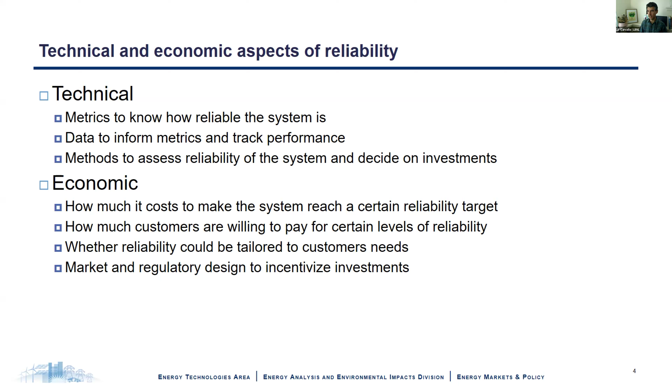As we will explore, the system is reliable in part because we operate it in a way that makes it reliable, but also because it has enough assets, and the right type of assets in the right places, to ensure that the system operates with certain performance levels. We'll cover the investment side specifically, which is tricky because many of our system investments are lumpy and long-lived, so we'll cover some of the specific incentives designed for that.

Just to wrap up this economic and technical element of reliability, I wanted to show this clear chart developed by ERCOT, the Reliability Council in Texas, where they analyzed this. A lot of this graphic won't make sense right now, but hopefully it will be easier to digest towards the end if you know nothing about reliability right now.

This graphic is showing essentially that all the way to the left, the system is underbuilt - it has a very, very small amount of slack. So the total system costs are relatively low, as you can see in the bottom pink line. But the costs of not having power, which are the green and red lines, grow significantly all the way up. The system is just spending a whole lot of money compensating customers for power they didn't have.

All the way to the right, we have a system that has very little value of lost load, very little cost of power not served—it's very, very reliable. But the system is much more expensive; it is more costly to build that system.

ERCOT's analysis found that right there in the middle is where they had what's called a reserve margin—we'll cover what that is later on. That was the sweet spot where they built a system accounting for the costs of not serving a certain amount of power, the minimum across all possible scenarios, from a very unreliable system on one end to an overbuilt, super reliable system on the other.

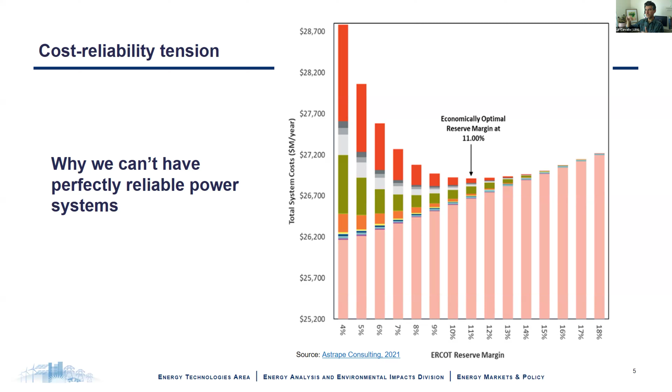This suggests why we can't have a perfectly reliable power system: if you keep minimizing the cost of energy not served, the system cost will keep increasing exponentially.

As I mentioned, I didn't want to leave this intro section without briefly mentioning the relationship between reliability and resilience. They are, of course, related concepts. In some cases they're framed hierarchically, as in that first ESIG graphic I showed at the beginning, where they depend on each other—in that case resilience was shown as a subset of reliability.

In this figure from the Organization of MISO States (OMS), they show it as a spectrum—going from reliability to the left and moving into resilience to the right, depending on the types of events the grid is subjected to.

In some cases, researchers have tried to frame reliability and resilience as distinct, very different things. I have personally been following, and I think the industry is moving towards, treating reliability and resilience as two complementary topics.

For example, DOE's Modern Distribution Grid report describes reliability as an objective of the grid, whereas resilience is an attribute of the grid—such that if this attribute is enhanced, I can more easily achieve the objective of producing and delivering power consistently to end users.

So we are all on the same page. Just in case, the resilience definition underlying this is the one from our recent Grid Modernization Lab Consortium (GMLC): the ability to prepare and adapt to changing conditions, and withstand and recover rapidly from disruptions—encompassing both deliberate attacks and naturally occurring threats or incidents, like extreme weather events, etc.

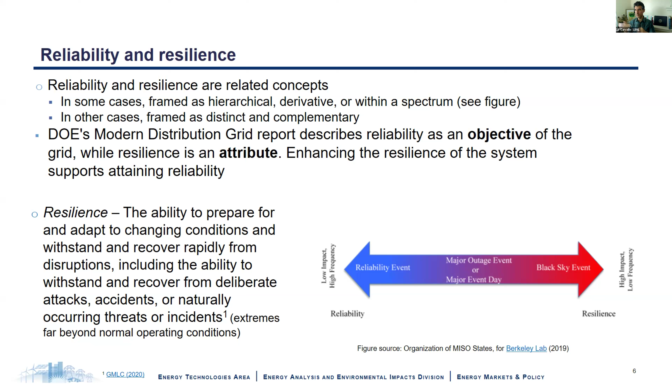This notion of preparing, adapting, withstanding, and recovering is typically associated with resilience across infrastructure in general, not only power systems. As the infrastructure behaves in this resilient way, reliability as an operational objective of the power system is also achieved.

Following this distinction between technical and economic perspectives, and the distinction between different domains in the power system, I'm going to split this presentation into three big groups. We'll spend a fair amount of time on the technical perspectives of the bulk power system.

Then we'll spend a bit less time—largely because there isn't a whole lot of work in that space—on the technical perspective of the distribution system. Finally, we'll spend a few slides discussing some economic elements.

As I mentioned, we're going to start with the bulk power system. This encompasses generation—any power plants, now storage too—transformers that step up the power to high voltage transmission lines, those really big lines you see outside. This one says 400 kV; they can go up to 750 kV easily, and can even be DC tie lines instead of AC, which can go up to 1,000 kilovolts.

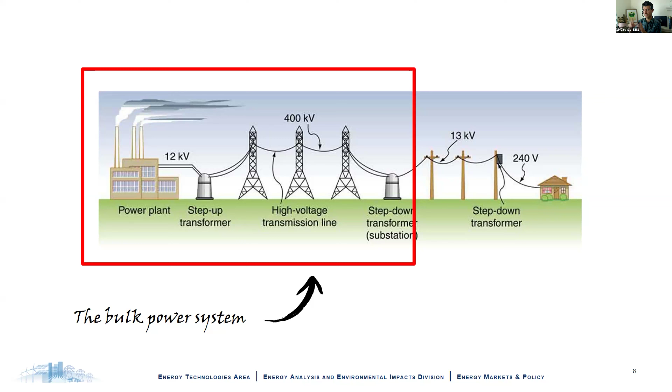Then we stop at this substation before going into the medium voltage level, typically 13 kilovolts—there are multiple voltages at the distribution level, but that's a typical one. This is where we'll be focused over the next few slides.

So when we focus on this particular bulk power system space, we start seeing specific definitions and specific authorities or organizations that look at this. One of the main important ones to track is the North American Electric Reliability Corporation, NERC, which has a much more refined definition of reliability for the bulk power system.

In their view, reliability is operating the elements of the bulk power system within equipment and electric system thermal, voltage, and stability limits, such that instability, uncontrolled separation, or cascading failures will not occur as a result of any disturbance—and they explain what kinds of disturbances they're including.

This definition includes some interesting elements that we're going to be talking about later on, but thermal violations happen when you're trying to push too much current through any type of equipment. So that means that you are underinvested. Voltage can happen because of that, but also because of dynamics.

And stability aspects are entirely operational, or for the most part, operational. So you can see that this is covering aspects related to investment, aspects related to operation, and some aspects related to emergency, things that can go wrong.

So from that perspective, we're going to split our discussion of the technical aspects of bulk power system reliability into three buckets. We're going to talk about adequacy, which you might remember, just some of these are copying what was in that first ESIG graphic that I showed at the very beginning.

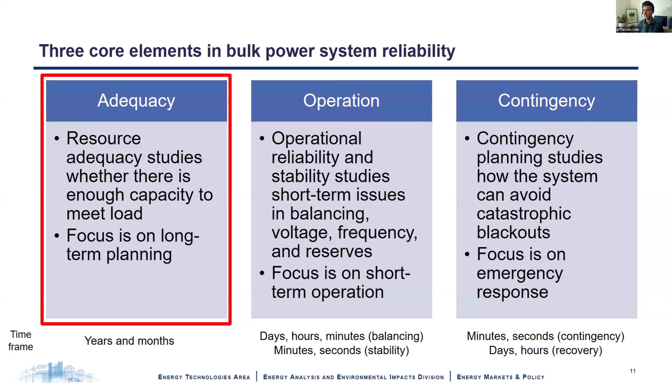So let's start with the adequacy. What is resource adequacy? You may have heard this term. It's been a hot topic lately for a number of reasons.

In part because there's been, over the last maybe decade, some pressure to start retiring plants that are uneconomical. And then there has been a fair amount of types of resources going into the system that are not dispatchable, and that make it a little trickier to understand whether we're going to have power at the right hours when the system really needs it.

And so the ISOs, the independent system operators and utilities in the US, have had to do a fair amount of work to catch up with these new developments, which is also happening across the world in other countries as well.

Resource adequacy is defined as the ability of the electric system to supply the aggregate electrical demand and energy requirements of end-use customers at all times, taking into account potential scheduled and expected unscheduled outages. This is a NERC definition, their latest glossary definition, adopted 20 years ago.

NERC, in a different document 10 years later, defines adequacy more succinctly but with an interesting new addition: the ability of the electric power system to meet demands for electricity using supply and demand side resources. So the 2011 definition alludes to using both supply and demand side resources to meet demand, not only the supply side implied in the older definition. This shows some evolution in the thinking of what adequacy is and how we assess it.

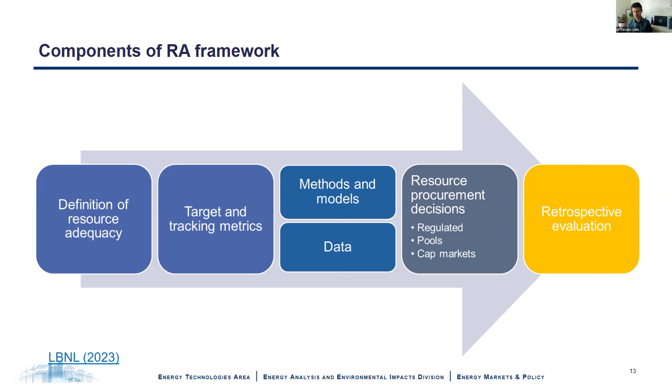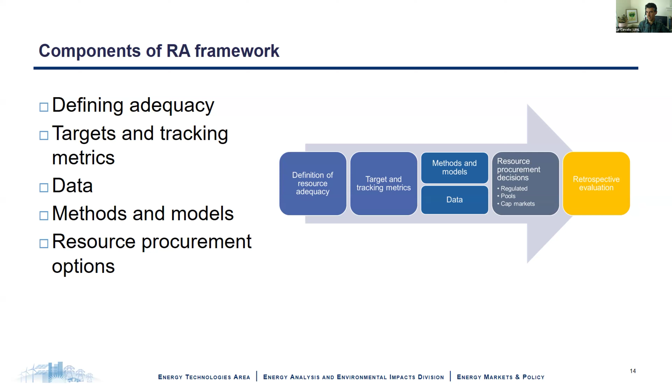But there are still ways we can conduct retrospective evaluations to ensure our resource adequacy assessment results are anchored in reality. I described these different components and was going to elaborate more, but I think you understand there are at least four key pieces here, which we'll discuss as we move forward.

In addition to the pieces that go into resource adequacy assessments, I wanted to cover at the onset the components of a resource adequacy process. Even though these processes are done both by independent system operators like MISO or PJM, and by utilities conducting their own IRPs as balancing area authorities, mostly in the Western US, I chose to use a process that MISO conducts, because it's a very typical structure for how you conduct resource adequacy assessments and connect them to market-oriented decisions.

You can see here, at the left of this diagram, there's a probabilistic risk model that is in charge of assessing, through a number of inputs, the likelihood of the system not meeting certain reliability targets or having shortfalls.

In this case, MISO uses this probabilistic risk model to identify seasonal needs and to produce a number of metrics that describe how the system is performing under the current investment levels and the types of events that could occur in the system. These fold into two key processes that we're going to discuss later: accreditation and the planning reserve margin calculation.

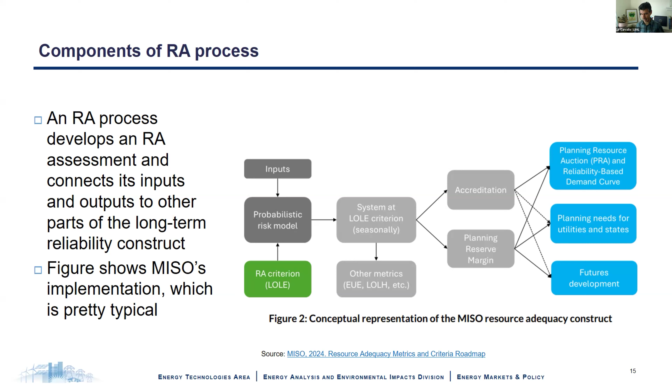In terms of assessing resource adequacy, the methods largely over the last—I'd say since the 1970s up until the 2000s, 2010s—what we used to do was a much more deterministic analysis that was largely looking at historical performance of the system. It was heavily based on historical performance of plants, how often they would go on outage, what kind of weather was affecting them, etc. It tended to look just at the peak hour or maybe a few top load hours, making sure the system had enough of a buffer within those hours to say, okay, we're going to be okay. In general, systems in the past were not unreliable because of this approach.

What we tend to see over time is that the systems were overbuilt. Large portions of the bulk power system were overbuilt over time for different reasons. In part because in the 70s there was a huge increase in load that led to a lot of build-out of the bulk power system. Then later, as it tapered, it produced slack that the U.S. power system enjoyed throughout the 80s and 90s. And then when the ISO world started existing in the late 1990s, they inherited these more spacious power systems that had already been paid for, for the most part, through regulatory approaches.

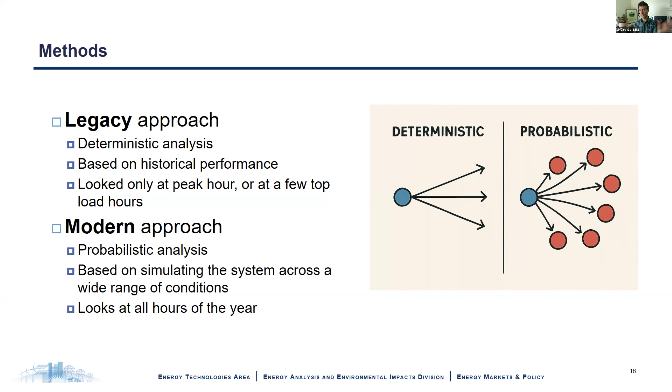Now, in the modern approach, we are in a world where we've consumed a lot of that slack and really need to invest—we have another wave of load growth coming through. So we now have probabilistic analyses that really try to examine a lot of random events that could happen and how the system can react to them, so we can get at the detail of how the system performs under most possible events. We do this by simulating the system across a wide range of conditions, looking at all hours of the year. So things have been moving from this legacy approach, and I'll be talking about this modern approach over the next few slides.

Right now we're going to go a little deeper into how we conduct this probabilistic resource adequacy assessment. I've created this figure that I think does a decent job of explaining what we're looking for when running these probabilistic assessment models. You can see here that we have probability distributions—these are in blue, the probability distribution of generation levels.

So for every given hour in the system, I'm simulating how much power I have available. There are many ways to do that more or less accurately, but at the very least, I'm trying to capture the fact that certain types of resources like solar and wind have a certain availability. In particular, solar, I know I don't have power at night or certain times of day. And depending on location, wind might have a certain probability of having certain levels of power.

In addition, I also have thermal resources that might be in outage for different reasons, or that might have been operating less efficiently because operating thermal plants in summer seasons degrades their power substantially. So there are all these weather, economic performance, and other variables influencing the generation side of things, which is why I don't have my full nominal capacity at every single time.

You can see here in the chart that the very right-hand side of this blue curve sits at maybe 7,200 — that will be your nameplate capacity, the maximum you can get. But for all these random reasons, the median value that you get is closer to 6,500. That's really what the system on average can give you.

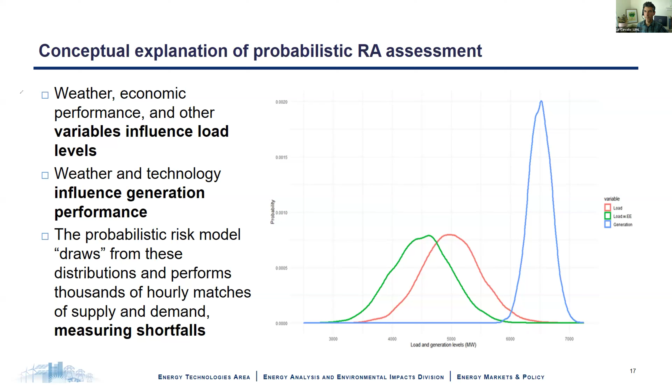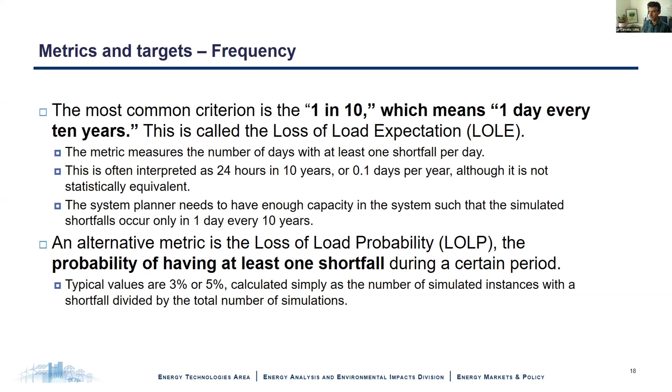Typically, the values used for loss of load probability are closer to, let me clear here, are typically in the 3 to 5%. There is an equivalence that exists between this loss of load probability and the 1 in 10 loss of load expectation that we have been using historically to plan our systems. But there are especially entities in the West that are using this loss of load probability.

Now, the LOLE and the LOLP measure a probability or an expectation of something happening, but it doesn't tell us anything about how much energy we're not going to serve or how big the shortfall might be. As you can think, it's different if I have a small shortfall that just misses a little bit of load versus if I have a massive shortfall that doesn't serve an entire state.

That's why more recently, planners that run these resource adequacy assessments have been including additional types of metrics. The expected unserved energy measures the magnitude of the shortfalls, how big these are, and this is usually expressed in parts per million.

Then there are two metrics that try to measure frequency: the loss of load events, which tries to measure the number of events that have at least 1 hour shortfall, and the loss of load hours, a duration metric that tries to count the total number of hours simulated where a shortfall occurred, regardless of the magnitude. So you can think that these different metrics give you pieces of the puzzle.

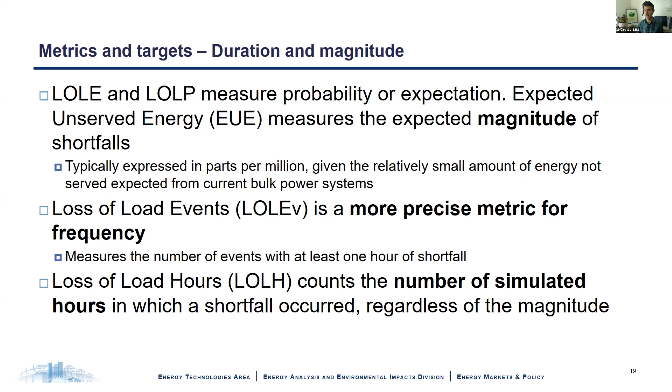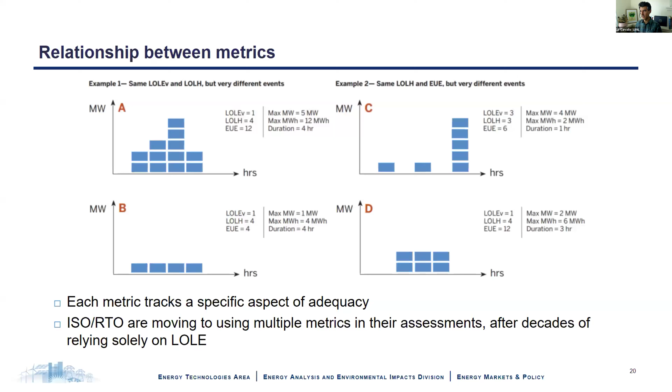Now, before we continue, these metrics don't mean you're going to have an expectation of 3, 4, 8 hours of outages per year. It means that in those hours, you might expect to have to operate some contingency plans or contingency resources to avoid losing load. There are some of them we're going to explore later.

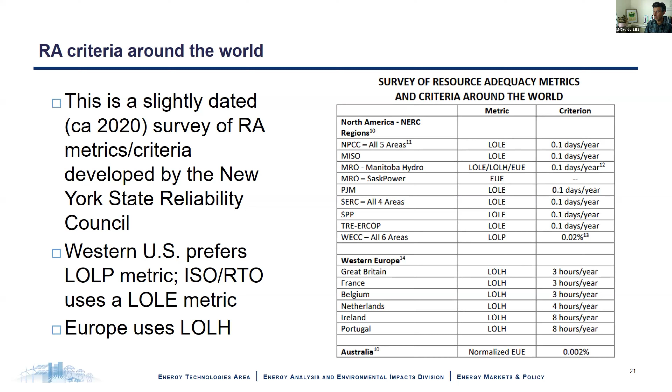Finally, you can see that Australia, at least by 2020, had already moved to a normalized unserved energy metric. They were aiming for something like 2 parts per million of energy not served, and that was the metric they were using.

As I mentioned with that example from ERCOT, from that curve we were seeing, one of the things in that curve at the bottom was the planning reserve margin. Now we're going to explain what it means.

The planning reserve margin is a key calculation that comes out of resource adequacy assessments. It's a single value that tells us what is the capacity buffer we need to achieve a prescribed level of reliability, such that we have enough resources, either by redundancy or by overlapping diversity in their production, to meet load at the prescribed levels we're trying to achieve.

You can think that a lower loss of load probability will require a higher PRM, just like that chart from ERCOT showed. As you move to the right in that chart and had a higher planning reserve margin, that needed higher levels of investment, and that generally leads to lower levels of loss of load probability.

The planning reserve margin shows up all across the country, regardless of the jurisdictional or industrial organization. In wholesale markets, the planning reserve margin is part of the capacity obligation for load-serving entities.

So once the ISO establishes a planning reserve margin, it looks at each load-serving entity purchasing power in the wholesale market to serve its customers, and tells it: you've got to show me you're purchasing enough capacity to cover your peak load plus this extra buffer. That way, we're ensuring you have enough reliability for your customers, and you're not free riding on the rest of the market.

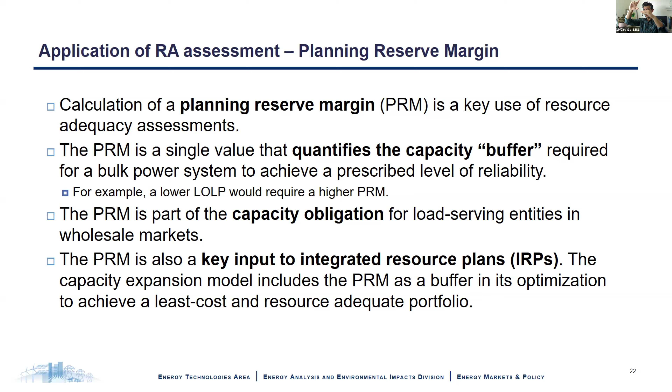So the way planners do it is they calculate the planning reserve margin and build this into their optimization models, saying: my optimization model will meet this load, and then meet this additional buffer. So this is what we have to build, and so forth.

Another useful concept from the resource adequacy process is the capacity accreditation. If you remember from that MISO process, there were two key outputs of the resource adequacy assessment: one's the planning reserve margin, the other is this capacity accreditation. The capacity accreditation tells us how an individual resource contributes to resource adequacy.

I'll quickly anticipate, you might see it here below, the ELCC, effective load carrying capability, which some of you may have heard of - it's a classic method to calculate this. It's not the only method, but it's typical, and I'm going to use it to explain how you calculate this capacity credit.

The capacity credit is very importantly used in wholesale market settings, because you want to allocate payments. All customers are paying for capacity - there's a wholesale market or some bilateral market set up so customers pay for capacity for a certain reliability level. But then you have to turn to the producers and allocate those payments - who gets this capacity money? The idea is you get capacity money based on how much you contribute to resource adequacy, and that's what the capacity credit allows you to do.

It also helps you determine whether load-serving entities have fulfilled the procurement requirements.

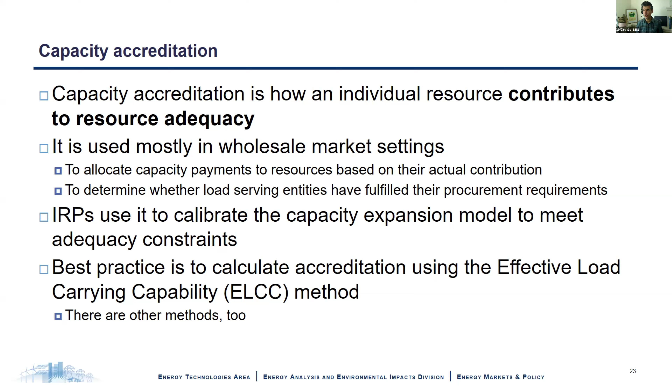In IRP, integrated resource plans that don't have wholesale markets, you can use resource adequacy and capacity accreditation methods to connect the capacity expansion model with resource adequacy constraints, so you can pass information about what resources contribute to adequacy more than others, and let the optimization model use that as a constraint to add resources in least cost ways, meeting not only energy targets but also these adequacy constraints. I'm going to explain the ELCC approach in particular right now, since it's such a widely used approach for capacity accreditation.

So the ELCC method, the effective load carrying capability approach, uses the LOLE study, this probabilistic risk assessment study we already described—remember those probabilistic curves for load and generation. That study is used to run an experiment, and the experiment answers the question: how much does reliability improve when a resource is added to a system, compared to that of perfect capacity?

So the idea is not only to test how more reliable my system might be when I add a certain resource, but to measure that in a way that is comparable to other resources. That's what we use this concept of perfect capacity for.

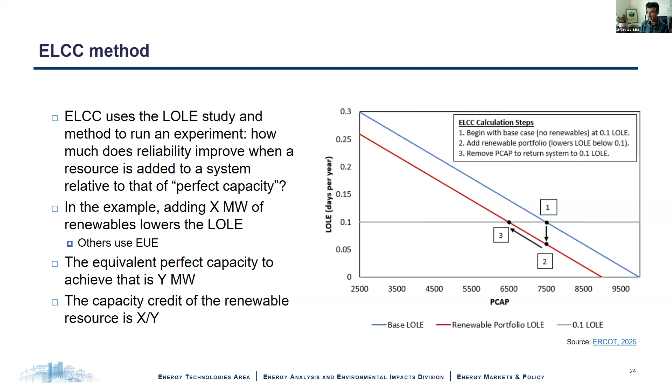And these have very direct, important implications on both payments for these types of resources and technologies for capacity, but also for ensuring that the system remains reliable.

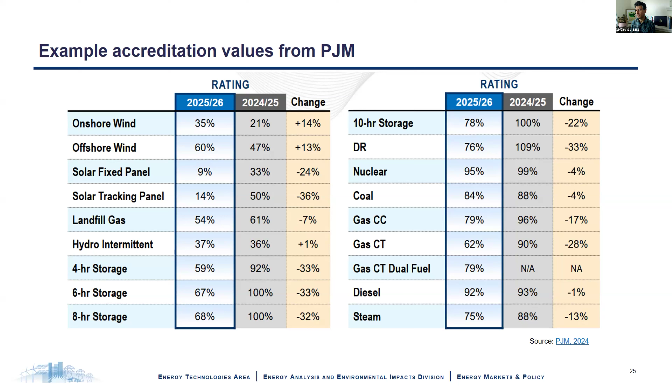As you can see to the right, most thermal and nuclear resources have much higher capacity ratings because they're able to either serve load consistently, flat generating, or be adaptive to load needs such that they can be present in the most required times. A classic example is a diesel engine, which is so expensive to operate that it's only used in specific hours of the year, but it's called and easily made available on the most stressful hours, so its ability to contribute to adequacy is always relatively high.

Now, to achieve resource adequacy, we're going to talk about the ways in which we can construct either regulations or markets to achieve the objectives that our resource adequacy assessment is proposing.

In vertically integrated states, the typical approach is using integrated resource planning. It's a process that ensures we're meeting projected load with the least cost, accounting for projections of load, fuel costs, technology declining costs, etc. It has an integral component devoted to resource adequacy, trying to ensure that the least cost system being built is also adequate and meeting minimum levels of reliability.

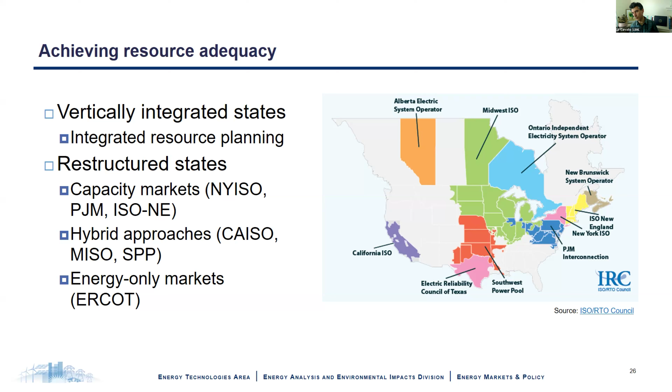There are some hybrid approaches, like the ones in CAISO, MISO, and SPP. For example, in MISO, they run what's called a residual capacity market, letting utilities figure it out with generation owners and transmission owners who's going to get what capacity. When there are gaps remaining, those go to a residual bidding or auction process to fill them in. Then there are energy-only markets, like ERCOT, where capacity doesn't have a price. We'll cover this a bit later, but it's an approach where just the regular bidding in the day-ahead and real-time markets produces cost signals that should be enough to warrant or induce investments for adequacy in the long term.

So I'm going to cover briefly these three different approaches to ensure adequacy. We're moving into this space of adequacy and investment, in part because investment in power systems has many implications, one of the big ones being making sure the system is reliable.

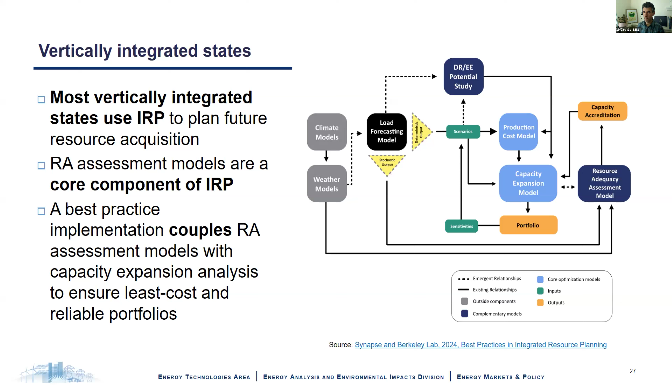So on the restructured states, the ones that have capacity markets, I'm going to explain a little bit how these capacity markets work and what they are. Capacity markets and payments are mechanisms that provide revenue for a resource in a market setting to contribute to resource adequacy. One important thing is between markets and payments, there's a distinction here.

Markets are competitive. You obtain out of resources that bid into certain types of auctions, there is a capacity price that is established, typically once per year, sometimes once per season, and most of the time across different zones, recognizing that some of these ISOs cover large territories, and so they have different transmission constraints that make their adequacy assessments non-trivial. But the markets are essentially producing a capacity price.

In some cases, the payments and the establishing of this quote-unquote price is done administratively, and it's just set at a certain fixed value, typically using what's called the cost of new entry, or CONE. The CONE is really the annual payment that you need to cover a typical gas turbine that is used as a reference for what building capacity quickly would be.

These gas turbines are typically operated very little in the year, 1 to 2% of the hours, because they are really capacity resources. They're there not to operate continuously because they're fairly inefficient. I'm making the distinction here between gas turbines and combined cycles, which are fairly efficient. These turbines and diesel engines are largely used just to show up in those peak hours, just to serve demand when the times are more stressed.

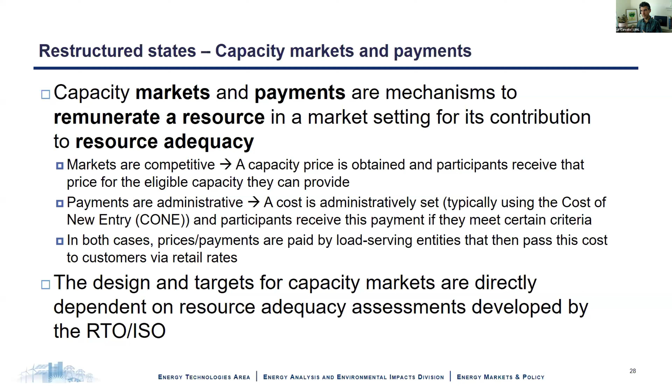So the designs and targets for these capacity markets are, of course, dependent on resource adequacy assessments. And there is a whole lot that we could discuss here that we don't have time for. But I'm going to show just very briefly some of these elements and how they work.

So capacity markets have multiple design features, but at the core, they are set up as forward-looking auctions. So every year, and sometimes every half a year, but mostly every year, the ISO goes out and says, okay, we need this amount of capacity for the next few seasons, and then it opens this for bidding. And different types of resources have to bid and say what kind of cost they're willing to, or what kind of price they're willing to receive to produce capacity.

And those resources have to be thinking and knowing that they have a certain capacity credit that they have to take into account. That's why if I'm bidding as a solar resource that I know I won't have power in the middle of the night, I have to be careful not to bid too low or bid too high, or even to participate depending on how the market is set up. So there is a whole lot that goes into how to define my bids and how to participate.

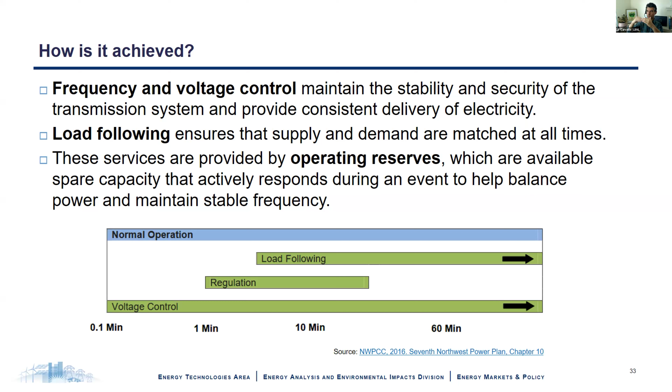So these services are typically provided by what's called operating reserves, machines that are not only doing energy services, but are only using some of their output to regulate, and they're typically compensated for that.

On the contingency side of things, contingency operation consists of actions employed to prevent further system degradation, or to halt a degradation process when you're in an emergency state. In this case, typically contingency operations are mostly entirely technical. The cost of how you operate and how you achieve, especially averting some of these crises, is typically secondary, in part because this happens very little, and in part because a blackout is substantially a much higher cost on face value than any of the types of costs you can incur to prevent or restore the system after a contingency.

Contingency operations include the draft of contingency plans, sometimes called defense plans, which is usually a manual, but a mix of strategies.

Some of these actions are automatic, programming different components of the system. Some of them are manual.

A classic example is rotational load shedding events, which have been in the news at times. These are typically used by system operators as a last resort to prevent a full blackout, shedding load specifically in places that don't have enough generation to serve. They balance the system, and then slowly, as more power becomes available, bring the load back carefully so they don't induce strong dynamic reactions in the system.

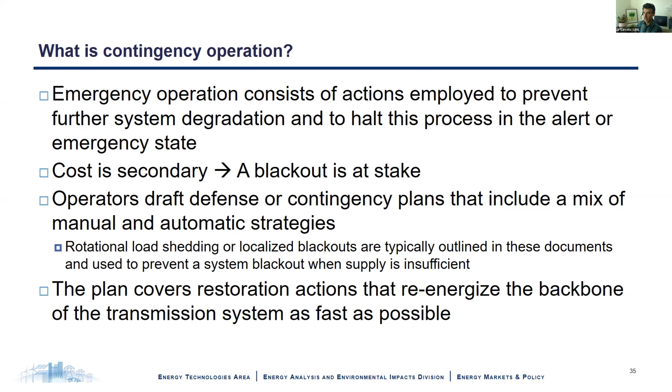Contingency operation relies on different types of reserves operating in different timeframes, typically longer timeframes. There are spinning reserves, which I mentioned are also used for frequency and voltage regulation. These are operating machines reserving portions of production not for the market, but for ancillary services. There are also non-spinning machines—and spinning and non-spinning, of course, is a legacy of the times when we had rotating machines feeding our grid. These terms might become less useful as we think about supply side and demand side resources that aren't spinning at all.

The idea is that non-spinning reserves are machines that are offline—they have to be brought online and synchronized to provide support. Then there are black start units, specific generators equipped with specific equipment able to start the system from a blackout.

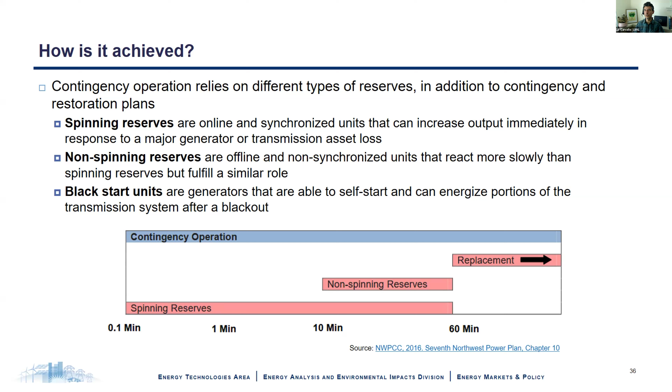Let's turn now to distribution systems. As I mentioned, we spent a fair amount of time talking about the bulk power system—that's the bulk, pun intended, of our presentation today because it's a hot topic, where a lot of the reliability discussions are happening. But I didn't want to skip talking about the distribution system and what it implies.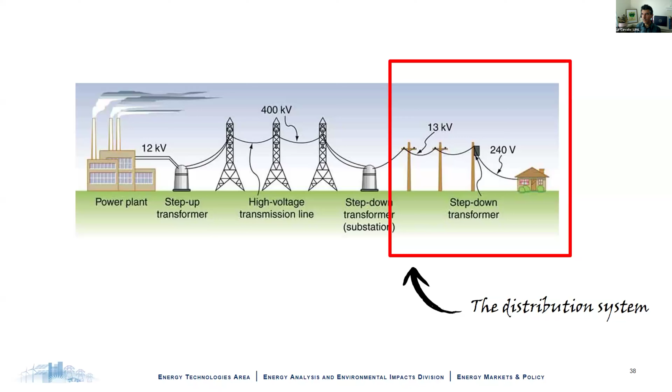Reliability in the distribution system is generally seen as the ability to deliver uninterrupted service to customers. It's important to know that around 90% of the interruptions you might get at home or in commerces, at the customer level, actually originate in the distribution system—that tree branch that fell on an overhead line during a storm, or that squirrel that got fried chewing on the wrong cable and caused a short circuit. These are more localized events happening on a much more frequent basis, not quite the types of larger events we were just examining in the bulk power system.

If I've done a good job using these two terms, you'll rarely have heard me say interruptions when talking about the bulk power system—I should have been using the word outage, and I hope I did. An outage is when an asset cannot perform its normal functions. So the bulk power system's resource adequacy process and operational reliability are about preventing outages, preventing assets from going out of service. Interruptions refer to the availability of electricity to end users or customers. So an outage could cause an interruption, but not always.

For example, if I have two parallel lines serving one customer, sized such that each one individually could serve that customer, if I lose one line—if I have an outage in that line—I can still serve my customer. My customer does not have an interruption. This is an example of the N-1 criterion, which is used to ensure system reliability. It's typically used in transmission systems to ensure portions of the transmission system can take on the load of other portions that might fail, continuing without producing an interruption to customers.

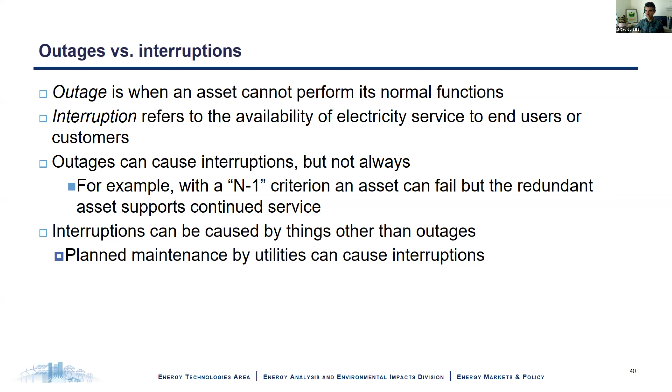At the same time, interruptions can be caused by things that are not outages. For example, planned maintenance. If a utility has to replace a pole, it might have to interrupt you for a couple hours, and that's not really an outage, or it could be called a planned outage. But there should be a distinction, and I make it here because the bulk power system is largely focused on outages, and the distribution system is largely focused on interruptions.

From the metrics perspective in the distribution system, there have been several decades of experience tracking the performance of distribution systems through understanding the interruptions that occur to customers. These are codified in the standard IEEE 1366, of which the most current version is 2022, though I think the standard originated around 1998, or even earlier. These metrics, as opposed to the resource adequacy metrics that are the outcome of simulations, actually summarize what has happened in terms of interruptions in actual circuits, feeders, or entire utility systems, focused on actual events.

Many states do impose some maximum or minimum standards. As in the resource adequacy world, where we have metrics and we try to invest in the system to achieve a certain level, on the distribution system side the utilities are incentivized or required to achieve at least minimum standards, typically at a circuit level. In some states, the utility has to file a reliability performance report, and typically they're required to describe if there are specific customers or circuits that are underperforming, producing a very low reliability experience for customers, and propose targeted interventions to improve those.

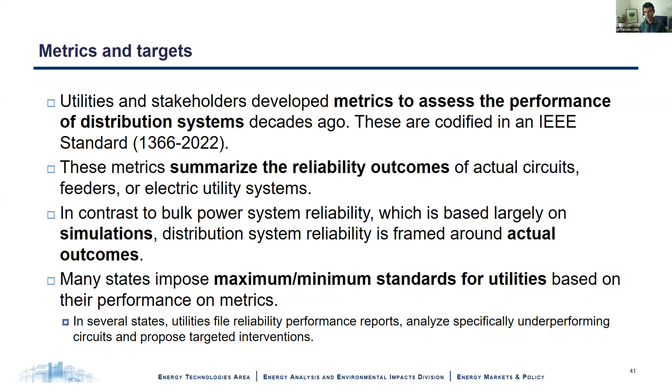There are certain basic metrics in the IEEE standard, some that you may have heard of: SAIFI, SAIDI, CAIDI are typical ones. I'm not going to go into detail on what these are, because you can read about them later, but I want to convey that these are doing the same thing that some of the resource adequacy metrics were doing.

SAIFI tracks frequency, the average frequency of interruptions. SAIDI tracks the average duration of interruptions. CAIDI tracks the duration of interruption for customers that are interrupted. So if you're a customer that gets an interruption, I take all the customers that were interrupted and get the average of their duration, as opposed to the system level, where I just take the whole population and determine the average frequency and duration for those.

Another important concept, not exactly a metric, is the MED, the major event day, at the bottom of this table. The major event day is a distinction established a while ago, where with certain statistically defined thresholds, a utility can classify one day as a major event day, and then it might not count that day towards the calculation of SAIFI and SAIDI, or it is required to separately report SAIFI and SAIDI with and without MEDs. The reason for this is that major event days vary substantially across time, particularly because weather varies across years.

Even though there might be trends in how weather is behaving, I could have a very dry year and a very wet year, and that might have very different implications for how load was showing up and how my system was performing. So they try to keep track of performance without the major event days to get these long-term trends, and then in many cases there's also more pressure to perform well under major event days.

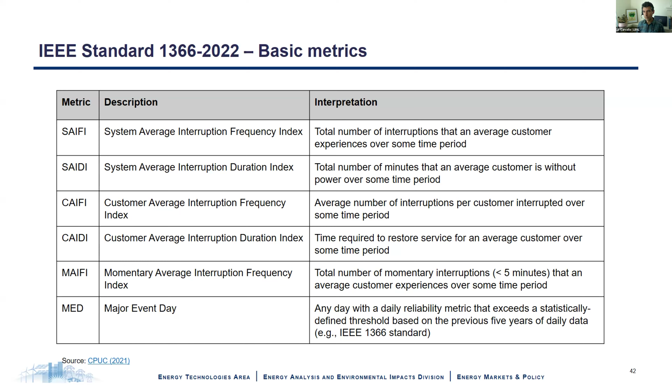All of these are generally counting the number of customers going through certain types of outages or interruptions, either momentary interruptions, multiple interruptions—there are different flavors. They still remain, in my mind, a little bit incomplete, in that they're not really establishing a standard for a specific customer. It's just saying, hey, you have a certain amount of customers that are not having a good time. It doesn't quite lead to the specific action to say, oh, customer A needs some help because their particular reliability standard is not good.

But there is evolving progress in this direction, in particular with smart metering or AMI, which allows customer-specific reliability metrics to be developed very easily.

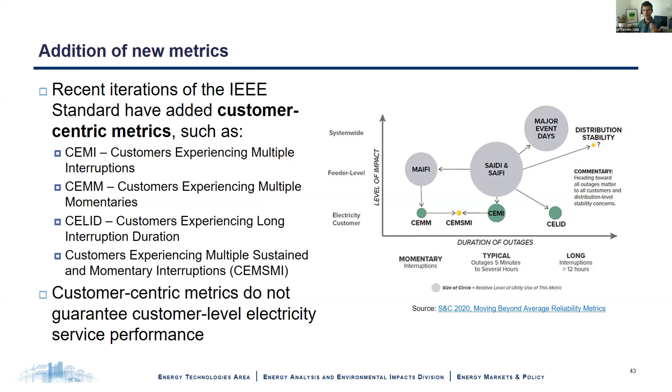The way distribution utilities track interruptions is using what's called an outage management system, or OMS. This is software used by utilities to manage power outages, to detect them, ingest them, locate them in their GIS systems, send the crews, and then restore power.

These systems were originally developed by some utilities in the late 1970s, but then in the late 1980s, some of the first commercial outage management systems were developed.

In the past, this is how they detected outages: someone calling to say I don't have power, then someone else calls to say I don't have power. You put those on the map and start seeing how that correlates with certain portions of your grid, giving crews a better idea of where to look for something bad happening, either a tree falling or a transformer exploding.

As smart grids and smart meters have been introduced into the system, now we have automated ways to find where the interruptions may be coming from, which allows crews to go much faster to restore power.

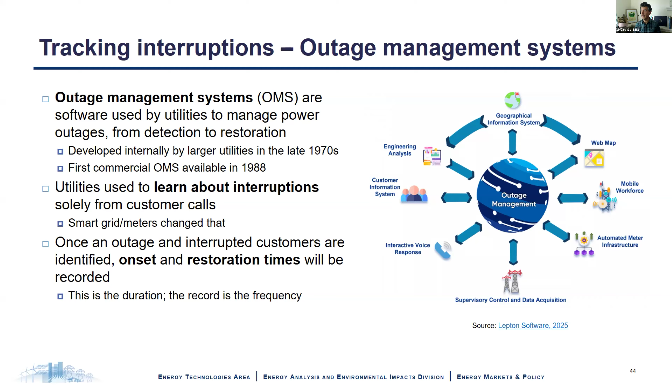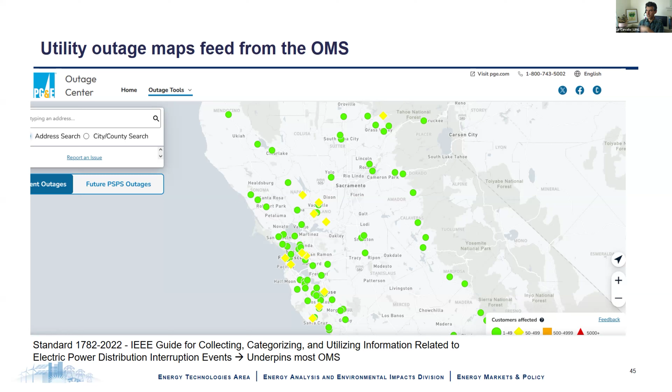You can see here I extracted some utility outage maps that are feeding directly from the OMS. This is the source. This is a particular map from PG&E showing customers affected in different parts of their service territory, and this is now very common for many utilities, especially large ones, who have these maps available to customers.

As we talked about in resource adequacy, how to achieve adequacy, this is kind of the equivalent one slide on how we achieve distribution system reliability.

Ultimately, it boils down to both how we operate the system in such a way that it can be more reliable, and how we build the system to make it more reliable and potentially more resilient. Distribution system planning is one of those processes.

There's a whole lot we can talk about regarding the types of models and data that are used, but there was too much for today.

There are internal utility planning processes where utilities are conscious about the reliability issues in their systems. They know about circuits that underperform, and they keep developing plans to either underground some overhead systems to make them more reliable, or sometimes to add redundancy to ensure that customers can remain with power, etc.

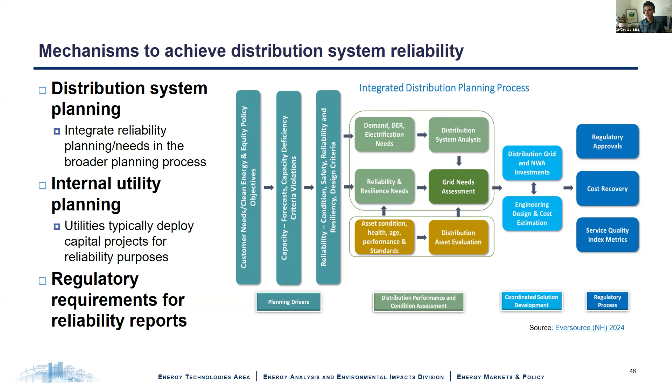As I mentioned, there are some regulatory requirements for reliability reports that are also another way in which, at least, regulators can look at certain underperforming areas and suggest investments.

Now we're going to be on the tail of our presentation, and we're going to move out of the technical side where we reviewed bulk power system and distribution system aspects of reliability, and look at the economic perspective, or what I'll call the cost of unreliability.

Power interruptions cost money, and it's actually surprisingly hard to find power outage specific costs. Usually when you have the cost of big events, you have costs that include a lot of the infrastructure losses, insurances, and things that are not specifically power related.

But this is an effort made by the Department of Energy—this actually is the Executive Office of the President—from 2013, trying to put a value on power or energy not served. There are multiple ways in which people and businesses are affected by the lack of power.

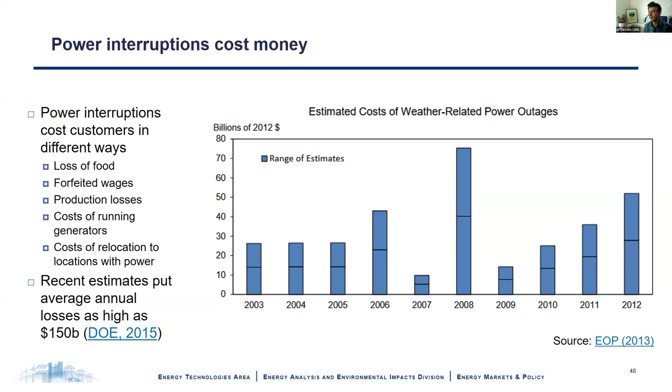It can be the loss of food that was refrigerated, wages that you couldn't get because you couldn't get to work, losses on production for firms that have manufacturing, the cost of running a generator if you're trying to avert that interruption by mitigating it, and the cost of relocating if there's no power for too long and you need to relocate out of the area. So all these different costs play a big role. There are recent estimates from 2015 that put average annual losses as high as $150 billion, so there's a fair amount of money here in terms of the cost of not having power.

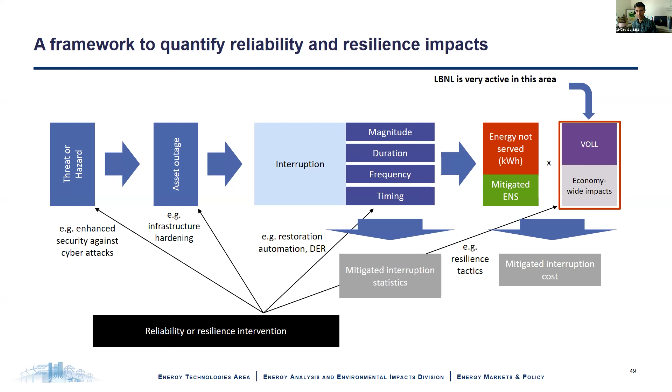Interruptions—the magnitude, duration, frequency, and timing—all affect eventually a certain amount of energy not served. And then that energy not served has a cost, using a concept called the value of lost load, that we're going to cover now.

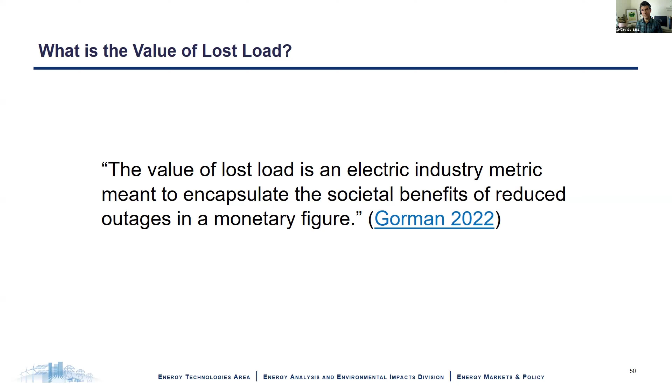The value of lost load is a key economic concept tied to power system reliability. Relying on the definition by my colleague Will Gorman, the value of lost load is an electric industry metric meant to encapsulate the societal benefits of reduced outages in a monetary figure. The value of lost load is essentially the cost of not having power, and it varies substantially by customer, by location, and by time of year.

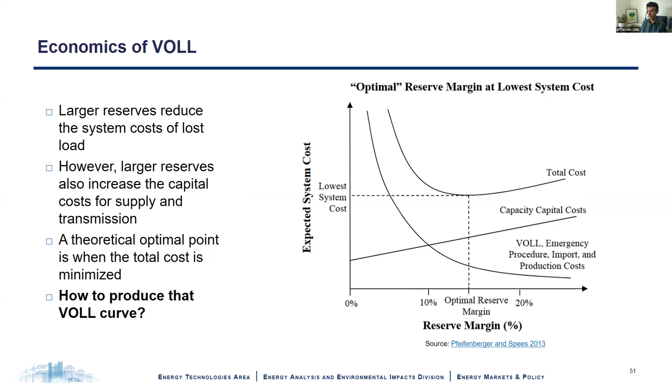But now the question becomes, where does the value of lost load come from? How can I produce the curve shown here, or in general, how can I produce the value of lost load? My group at LBNL does a fair amount of work trying to measure the value of lost load, and we've derived multiple different methods, coalescing into what's called a hybrid method, where we mix surveys with models.

Very briefly, there are a few different ways. Traditionally, survey-based methods—what's called stated preferences—is how the value of lost load has been measured. Typically, you go to customers and ask them how much they're willing to pay to avoid an interruption of this sort, or to not have power at this time of year. They tell you a number—$100, $150—and we translate that into a normalized monetary value.

There is also revealed preference, a method where we see how people make day-to-day decisions in different purchases that typically relate to mitigating the impacts of interruptions, and that reveals how much they're willing to pay to avoid those.

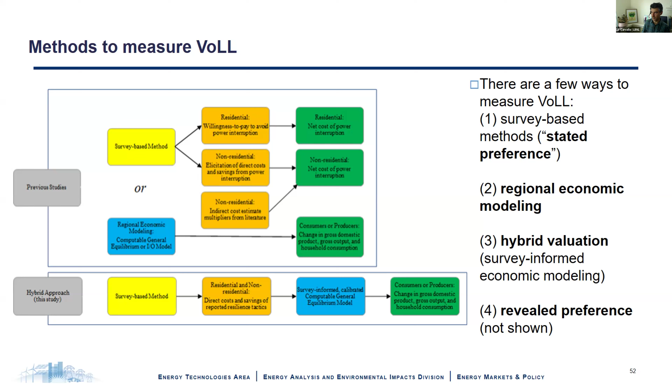The methods we're using right now, the cutting-edge methods, are regional economic models, where we track the relationship between having or not having power and production across many different economic sectors. We can measure in GDP loss the impact of not having power, and we use the surveys to calibrate these methods. This is the hybrid valuation method, which is the cutting edge in measuring the value of lost load. There are largely two ways to apply the value of lost load.

Another approach that's commonly used is a cost-benefit analysis, where instead of trying to find the mix of investments that minimize cost, I'm trying to get as many of these mitigation strategies as possible, such that the cost-benefit of those strategies remains above one, meaning the cost of these strategies is lower than the benefit derived, calculated using the value of loss load multiplied by the amount of energy not served. If the benefit from mitigating that is above the cost, I should invest in that.

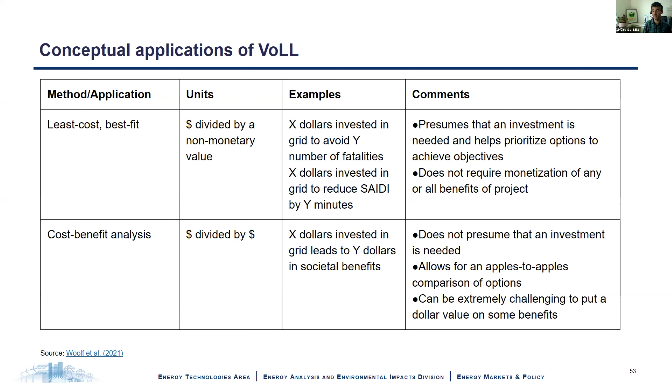A couple of tools we have for applications of this are the ICE calculator, which is geared towards and heavily based on surveys developed across the country, and is used to calculate the customer cost of short duration localized interruptions. And then we have POET, the Power Outage Economics Tool, which implements a regional economic model approach that allows us to understand the costs of long duration, larger, more widespread types of interruptions.

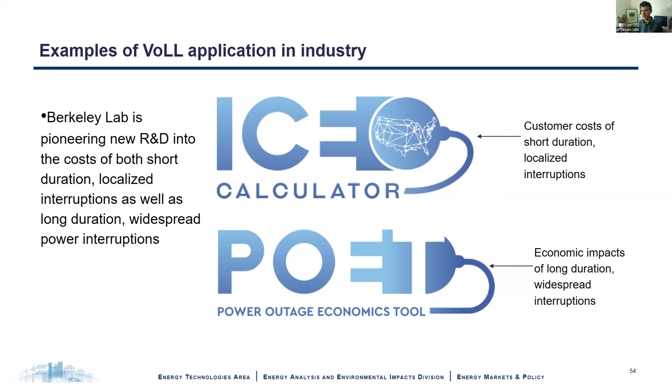And these can be used in complementary ways to calculate the costs of different strategies to mitigate interruptions across the entire power system.

One aspect I said I was going to cover here, as we're talking about economics, is the creation of these operational reserve demand curves. This is where value of loss load is used directly to construct this curve.

You can see in this curve that as I go to the left and get less reserves than I need, the price starts going up, as I want to give a signal to investors that I do need more reserves. If I have too many reserves to the right, the price is very depressed, very low. That means I'm all right, I don't need more reserves, so don't give me more.

Of course, markets try to clear at some point here in the middle, but the value of loss load is used here to give the ceiling, because the idea is that as I reduce my reserves and get to a point where the value I'm willing to pay is the value of not having power, that's the value of loss load.

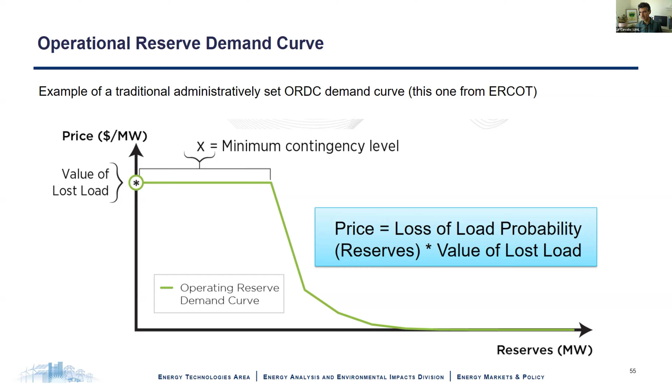Calculating this value, of course, is a whole challenge. I'm going to briefly cover some industry applications for the value of loss load. As you just saw, operational reserve demand curves require the value of loss load.

It's typically also used as the price for capacity or for energy during certain types of emergency events. In ERCOT, the value of loss load is also used to create system-wide offer caps, which are ceilings for their energy markets. But this was discontinued, especially after Winter Storm Uri, as I was explaining earlier.

In other ISOs, the value of loss load is typically also used to assess things in a cost-benefit analysis, like CAISO. They are willing to put in more transmission as long as the avoided expected energy, monetized by the value of loss load, is above the cost of that transmission.

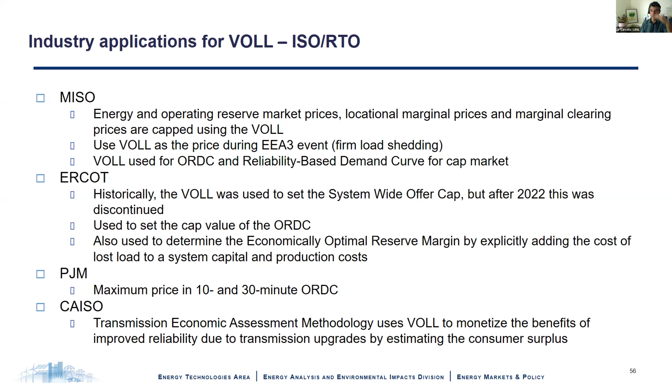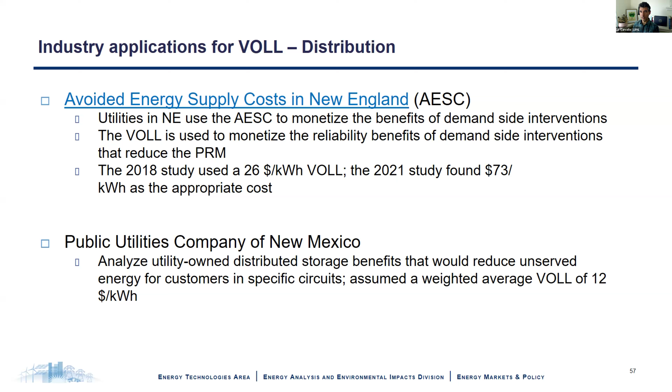At distribution system levels, you can use the value of loss load for avoided energy supply costs. In New England, for example, they establish a value of loss load and use it for any type of utility investment geared towards mitigating potential interruptions. In this case, they came up with a $26 per kilowatt-hour value of loss load in 2018, and then the 2021 study almost tripled that value. That tells you a little bit about the complexities of calculating the value of loss load.

Ultimately, we could get to a point where we can use the value of lost load and the concept of reliability within the planning process, such that we internalize reliability as part of the objective function, or as part of the cost that we're trying to minimize as a society.

This approach has not quite materialized yet, even though this technique was proposed in the 1990s. There's a lot of resistance to incorporating the value of lost load into the actual costs calculated in any type of investment decision making by utilities, in part because it's so hard to calculate.

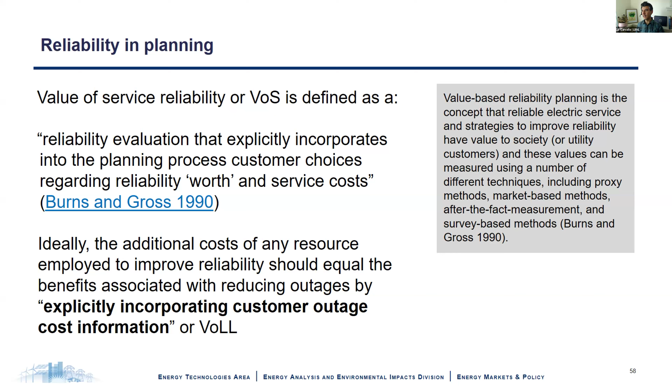So what happens in reality is that in bulk power systems, most IRPs use constraints and metrics. We're not really building to achieve the system that minimizes the value of lost load or makes it part of the overall cost. We're choosing this 1-in-10, or 0.1 days per year constraint, and we're willing to pay for that level without really understanding exactly what the implied value of lost load is.

There are all sorts of assessments that have been done pointing in either direction. Either the system is covering a value of lost load that's way higher than what customers should be paying, or others say the opposite, that the value of lost load is way lower than it should be. And that's because it's hard to measure.

In restructured states, as I mentioned, the value of lost load is used to inform the ceiling of auctions. So there is some use, but it's not really used in a more detailed way to inform the shape of these curves. Resource adequacy assessments and the planning reserve margin auctions remain entirely technical—we're not building systems to minimize or achieve a certain value of lost load level.

Distribution systems are more or less the same. Utilities can consider the value of lost load to justify certain types of investments, and they do, but it's not as common as you would think, in part because it requires measuring the value of lost load for that particular circuit, which is very time consuming.

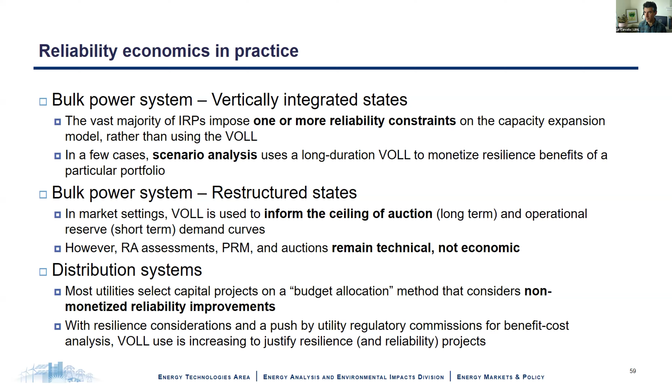So this leads to the last little bit here in the economics: why don't we use the value of lost load more extensively? That's in part because calculating defensible estimates of value of lost load is very expensive.

The recent project we ran to calculate values of lost load for dozens of utilities across the country was a very expensive effort that might not be undertaken by a single utility. It was actually the result of a joint effort.

Surveys have drawbacks—they're the easiest way to calculate the value of lost load, but this might involve speculation or bias. On the flip side, the regional economic models we've used are typically not grounded, and that's why we've tried to use the surveys to calibrate the regional economic models.

Even when you do calculate the value of lost load, there are multiple ways to measure it. You can calculate the cost of not having power for one interruption, the cost of an interruption for a certain length, and depending on the length, the cost changes non-linearly. So it can be $1 per kilowatt-hour not served, $1 per kilowatt, or $1 per hour interrupted. All of these can lead to different results with different consequences.

So still, lots of work to do to bring this core element of economics and reliability into practice.

So now, as I'm finalizing, I'll leave you with a few key takeaways. Hopefully you've understood that electric system reliability is about having enough supply, demand, transmission, and distribution resources to keep electric service up almost all the time. We cannot, and hopefully will not, achieve perfect reliability because it would be extremely expensive.

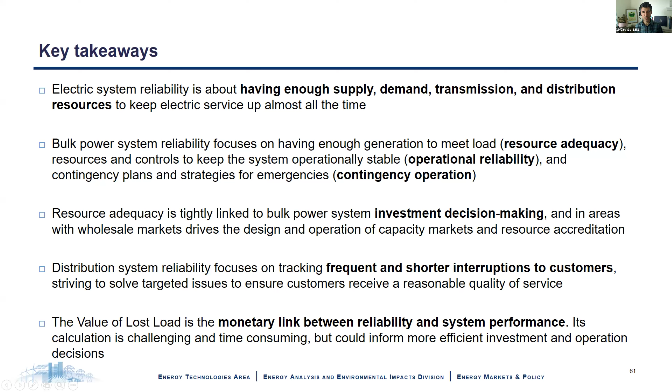So thanks so much. I have here one question on the chat, and I think we have a minute to take it. Miles, up to you if we have a couple more minutes to at least answer this question from Ian. Yeah, let's address the question - I don't see any others in the chat, so I want to address this one before we drop. All right, the question is really well framed, so I'm going to just read it and answer it right away.

The question is: how does all this that I've talked about with reliability interact with rapid demand load growth? If load cannot connect because there's no available capacity, can the value of this lost load be used to estimate that impact? There's a lot packed in here that's really interesting.

First, demand growth is something you would want to assess as a scenario in your resource adequacy assessment. It turns out that the load levels that go into resource adequacy assessments are trying to capture mostly weather variability and some economic performance variability, but rarely do ISOs put in different load growth levels and look too far into the future to assess how wrong their calculations can be. So there's already a limitation in how we're assessing, at least from the resource adequacy perspective, the likelihood of the system to have shortfalls because load is growing faster than anticipated.

The value of lost load might - I think what's implied here is that if load cannot connect, of course, for large loads, especially data centers, it's not like they show up and plug something into the wall and get going. We're talking about load levels the size of a city, and they require substantial permitting and coordination with the system operator to actually connect and start drawing power.